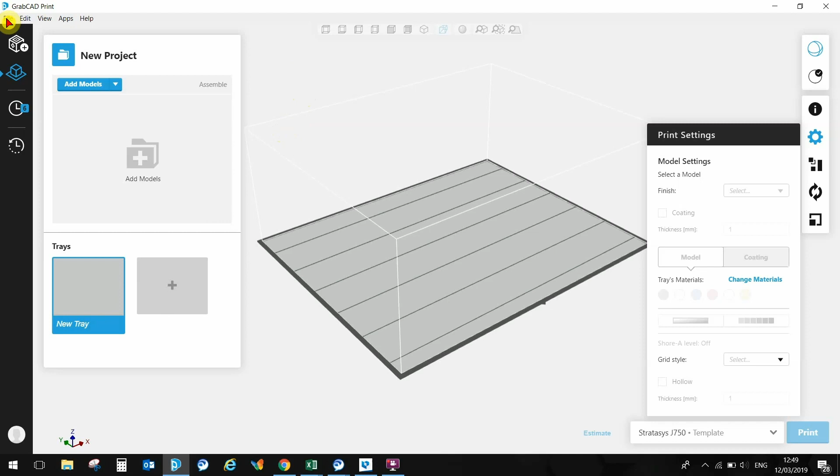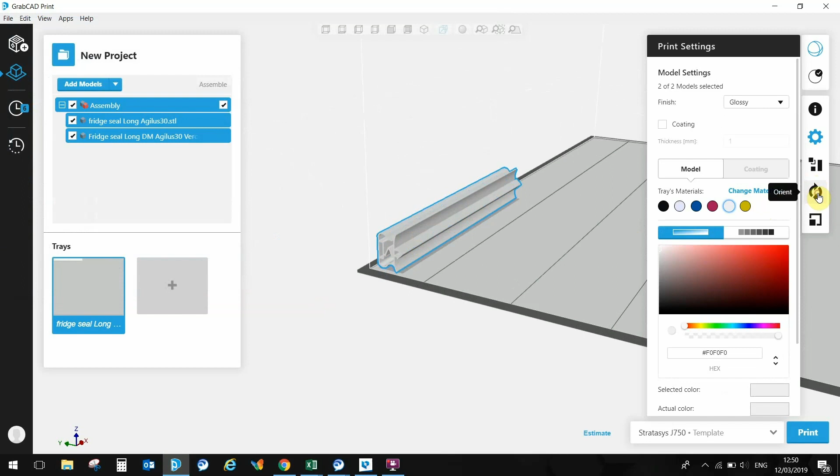So first thing to do is to navigate to File, and I'm going to add a model to the tray. For this example I'm going to be adding an assembly. This is a fridge seal assembly, and I can add that to my tray. Next I'm just going to adjust the orientation of the part, so it's a bit easier to work with, and this will be the orientation angle that we use for printing as well.

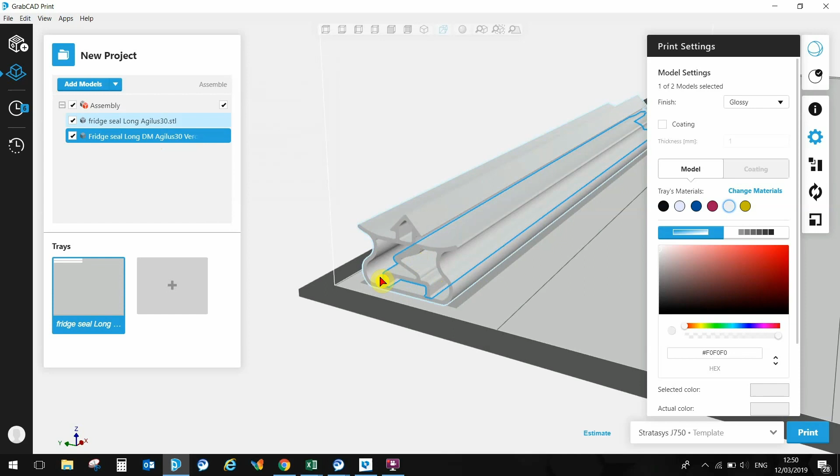Now if we take a look at the model that I've imported, it's an assembly of two separate shells. So firstly I have an inner core, and this is where I wish to have a more rigid shore value, shore A70, and the outer shell is where I wish to have the more flexible shore A30 Agilus 30 White applied straight up, and that will give me a nice soft touch and a very realistic feeling and acting model after printing.

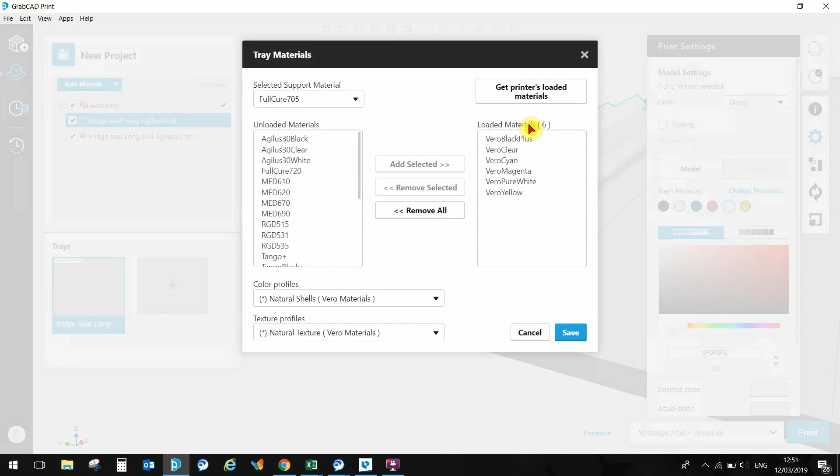So the next thing now to do is to go to my tray materials of the printer, and just to make sure that I have the right materials applied. So on the right hand side are the materials that are loaded in the printer. Currently we're working in template mode, and we're not actually physically tethered to a printer or to the J750, so I'm going to have to adjust the default materials so that we can import the Agilus 30 White material.

So because I wish to have my shore value with both a rigid white and also the Agilus 30 White material, so that my whole model is a uniform white finish after printing, I'm going to remove one of the other materials. In this case I'm going to remove my clear material. So I simply select it from the loaded materials list, remove that selection, and navigate over to my list of materials that I could add to the printer.

And this is a wide list of materials, and I can simply select here the Agilus 30 White and add that to my tray. Now save that option, and the first thing to do is to make sure that I have the right shell selected. I've got my outer shell selected. That's where I want the Agilus 30 White straight up for the 30 shore A value.

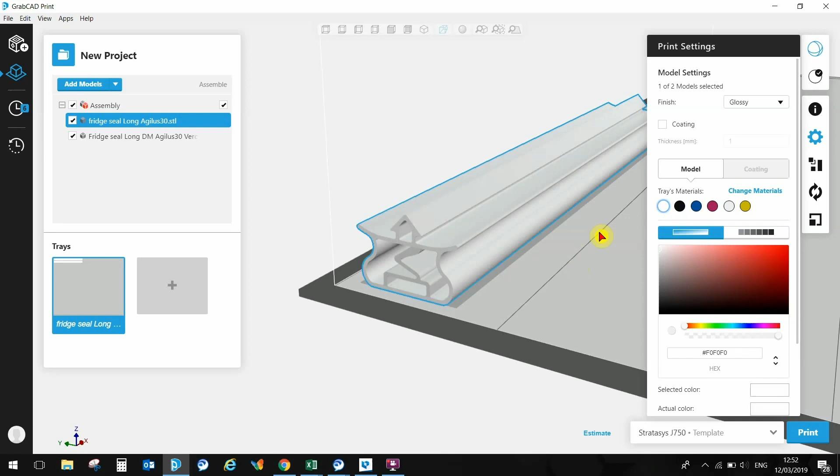So I'm going to simply select that material, and now I can select my inner shell and go to my Digital Materials tab, and from here, from the drop down menu, I have the full list of digital material options that are available to me. So this is a selection of between 2 and 3 different material mixes.

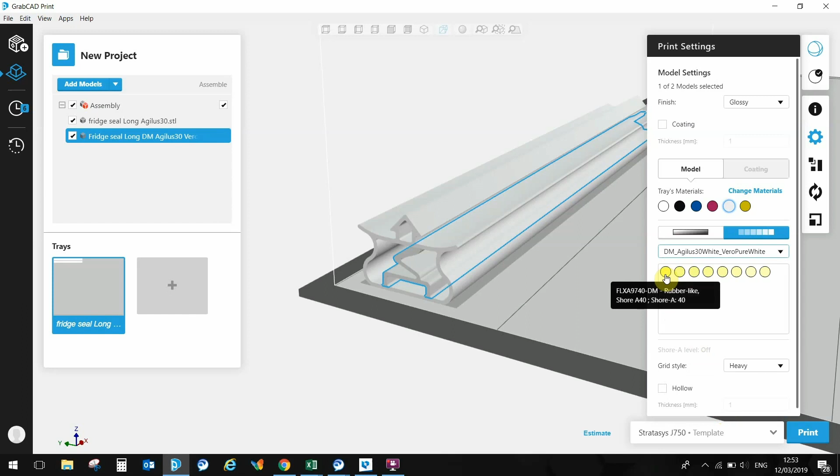In this instance I want the Agilus 30 White and the Vero Pure White material selections, and I have a range of shore values that I can choose. So this is shore 40, shore 50, 60, and here's 70. So I'm going to select 70, and that's applied that to the model. I can take these shore values all the way up to a shore 95, and I have a couple of other selections here as well for polypropylene like material behaviors.

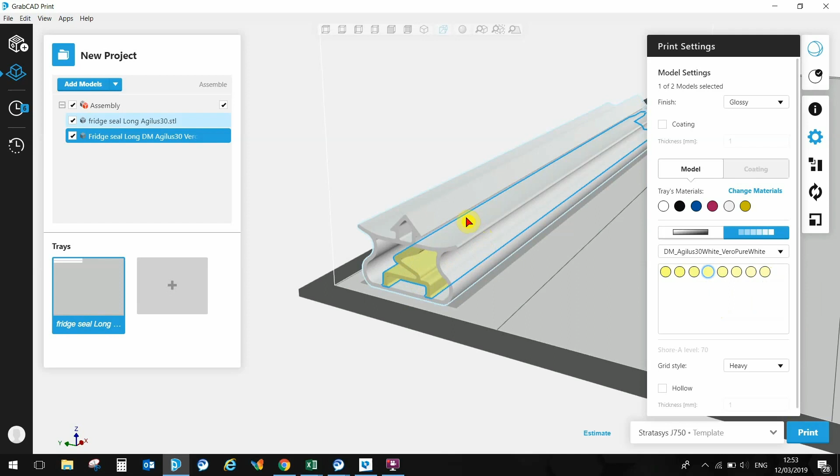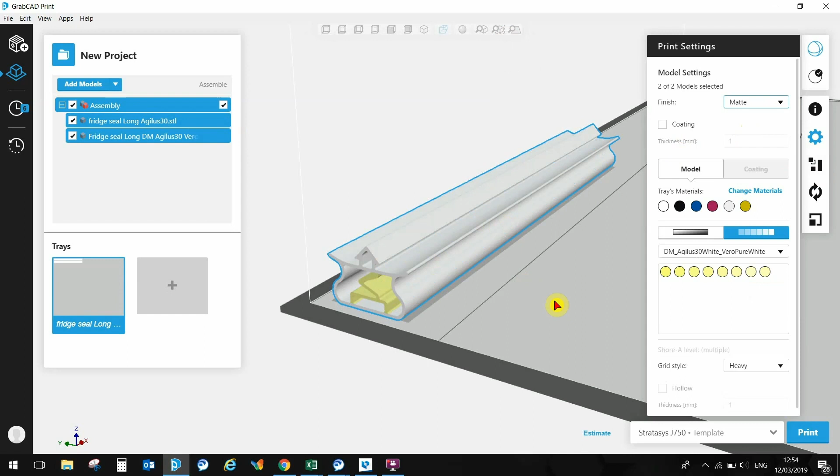So the actual part won't be printed in yellow. This is just for visualization to highlight the differences between the various shells that I have selected here. So that's the end of the assignment process. I can now carry out an estimate. Actually, before I do that, let me just make sure that the finish I have is appropriate for this job. In this case I wish to have a uniform finish across the part, so I'm going to select a matte finish from the drop down menu, and I'm going to go and run an estimate now.

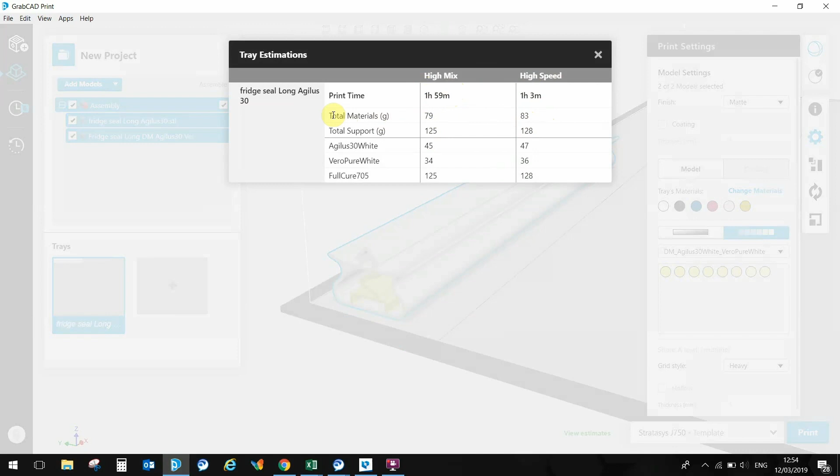And this will calculate how long the job is going to take and how much material it will use. So in high mix mode this will take about 2 hours, and in high speed mode it will take about an hour. And here are the materials that it's going to use, both the model material and the support material, and I can now go off and send this job to print.